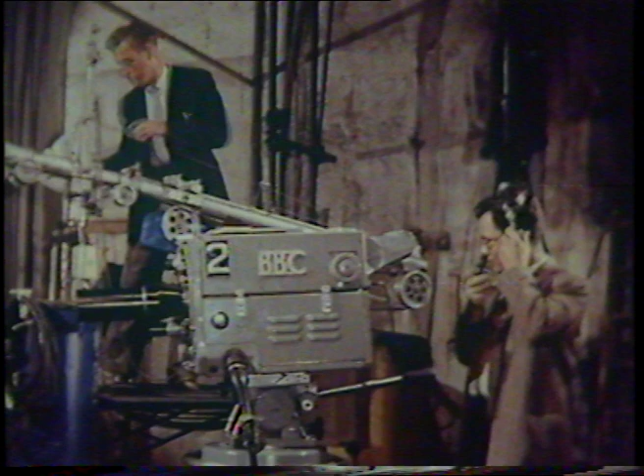Today, television is an integral part of the lives of most of us, bringing into our homes information and entertainment in endless variety. In the programs put out by the BBC television service, there's something for everybody: comedy, drama, music, sport, or the news. The news is one of the most widely viewed items in the day's program. Events of international importance, and some of rather less importance but no less interest, are collated, edited, and broadcast in sound and vision to keep you fully informed of up-to-the-minute happenings in the world around us.

Right. Cue caption scanner. Cue tape. Standby 1. Fade up 1. Fade down scanner.

Here is the news. There have been several political developments closely affecting Western Germany in London, Washington, and Bonn. Sometimes the seemingly less important news items are overshadowed by world events and lose some of their impact by their essential brevity. Take the next news item, for example. Television viewers in the south of England will have improved viewing, and the signal will have an extended range, for as from today there comes into operation the new television tower at Crystal Palace.

The Crystal Palace and the new television tower. This simple announcement begins the story of a tower that rose like the legendary phoenix from the ashes of its own past.

The Crystal Palace was a highlight in the history of the mid-Victorian period and had a very positive effect on art, commerce, and popular entertainment in its time. It all began with a scheme fostered by Albert, Prince Consort, to hold a great exhibition of all nations in London in the year 1851. At first, the idea was unpopular with many eminent politicians, but Albert and his supporters fought the opposition and won.

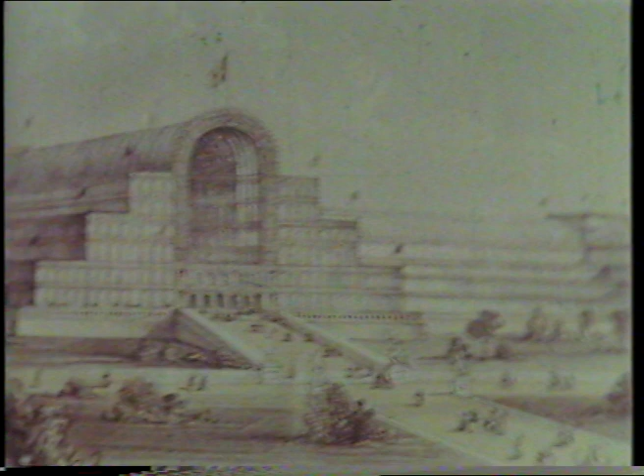Paxton had vision. Modern designers have referred to this building as one of the first successful examples of functionalism in architectural design. After the great exhibition was over, the structure was taken to pieces, considerably enlarged, and re-erected on the highest ridge of the Sydenham Hills. And so the Crystal Palace became nationally famous and one of London's most notable landmarks.

But times change, and popular taste in entertainment changes with the times. By the early 1930s, the palace had lost much of its popularity. New forms of entertainment had sprung up, and about this time, a new word was coined: television. A pair of water towers, 280 feet high, had been added soon after the palace was re-erected at Sydenham.

On one of these towers, experimental television aerials appeared. In this way, the Crystal Palace, center of popular entertainment and education for more than 80 years, became the center of early experiments with a brand new medium of expression. But not for long. One evening in November 1936, the building was totally destroyed by fire. The association of the Crystal Palace with television was over for many years to come.

18 years after the fire, the site was still derelict. The deserted gardens remained a clutter of broken stonework, dismantled railings, and weed-grown subways. And all that remained of the North Tower was the creeper-covered brickwork of its foundations.

Ironically, Alexandra Palace, built as a rival centre of entertainment to the Crystal Palace, became the headquarters of BBC Television in London, and until 1956, all transmissions broadcast over London and the South East went out from these aerials.

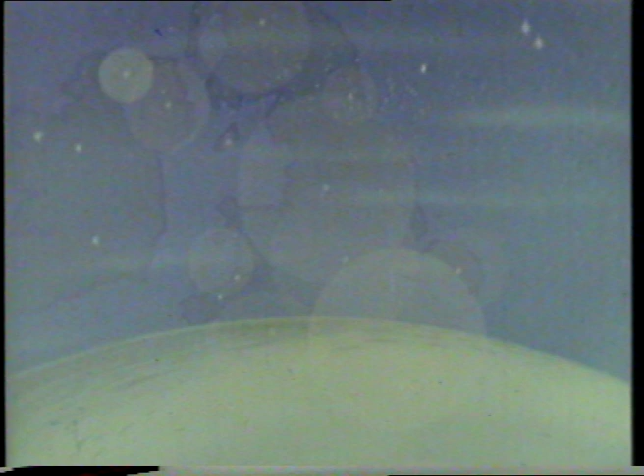This stylized drawing illustrates the principle. Very high-frequency radio waves are transmitted rather like beams of light. The range of reception is virtually the visual horizon as seen from the aerials. Therefore, the higher the aerials can be raised above ground level, the greater will be the transmission range.

Soon after the war, the masts began to go up. The 750-foot mast at Sutton Coldfield, serving the Midlands, was a stayed mast of triangular steel section. The next triangular section mast was built on high ground at Holme Moss to serve a wide area of the north of England. Other masts throughout the country were to be similar in construction.

But the aerials at Alexandra Palace were only 600 feet above sea level. To give increased range, a taller tower was needed, and a new site had to be found near London. Eventually, the engineers chose an ideal site, the very spot where the old Crystal Palace had stood for over 80 years. And so it was decided that the BBC's new London transmitter should be built on top of the long ridge of the Sydenham Hills. As soon as the site had been chosen, work began on the design of the new tower.

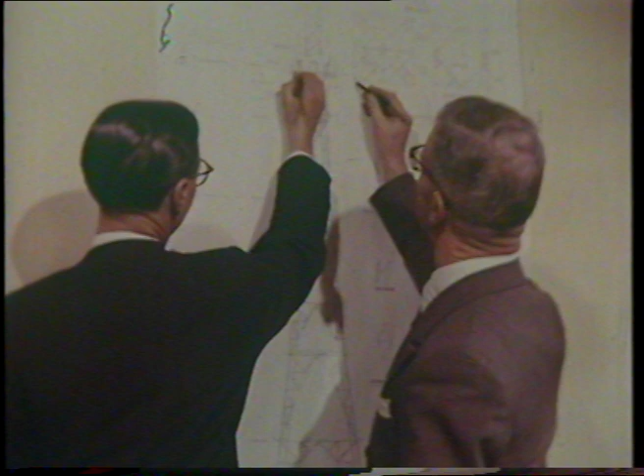At other BBC transmitters, stayed masts had been used. But site restrictions precluded the use of a mast at Crystal Palace, and it was therefore necessary to build a self-supporting tower. This form of construction is more aesthetically pleasing, an important consideration for such a landmark so near London, and the design received the approval of the Royal Fine Art Commission.

As the design calculation progressed, more and more work had to be done in the drawing office, preparing detailed drawings for the whole tower. At this stage, tests were carried out by the National Physical Laboratory and by the Imperial College to determine the aerodynamic stability of the tower.

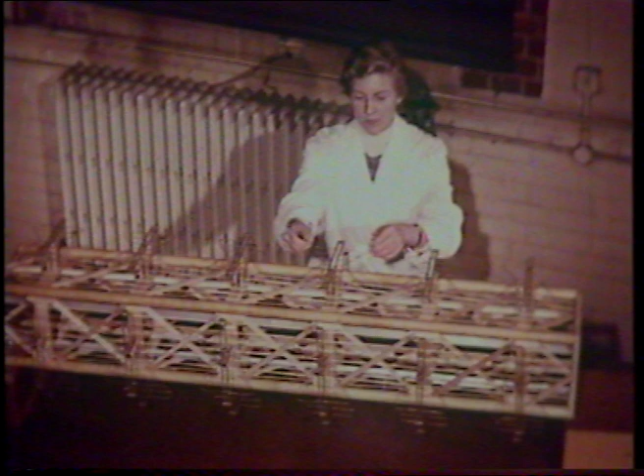For the purpose of tests, scaled sections of each of the aerial carrying parts of the tower were made. These sections were subjected to extensive tests in the wind tunnel. The airstream in the wind tunnel caused the models to vibrate, and in this way, knowledge of the behavior of the structure under various wind conditions was obtained.

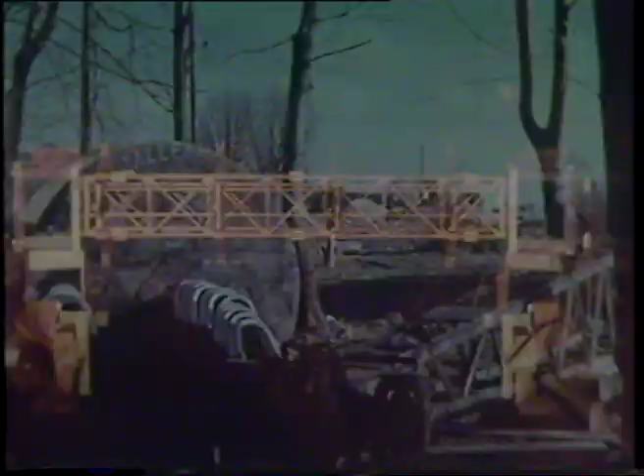Now, with the site cleared, the work of construction began. First, the area had to be accurately surveyed and marked out. Construction plant began to arrive on site.

Work had already started on the lower terrace, where the new underground transmitter building to house the electronic equipment was going up.

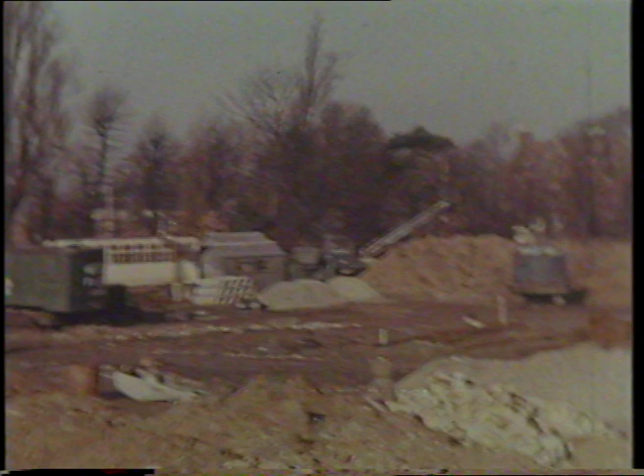Piles had to be driven to support each of the 4 legs of the tower, but because the transmitter building was being constructed close to and below the site, vibration had to be minimized. This factor was taken into account in deciding the method of piling to be used. The 4 concrete foundation blocks were to be set 120 feet apart.

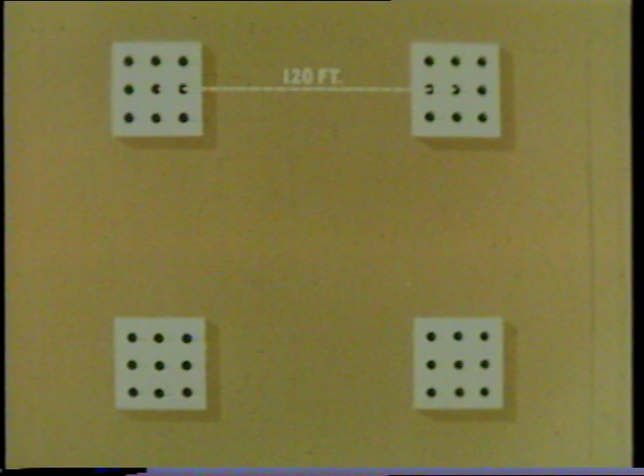Each leg was to be supported by 6 vertical and 3 raking piles capped by reinforced concrete. These concrete pads were to be 14 feet square and 4 feet thick. The piles would have to be driven to an adequate depth to support solidly the 4 splayed legs carrying the immense weight of the completed tower.

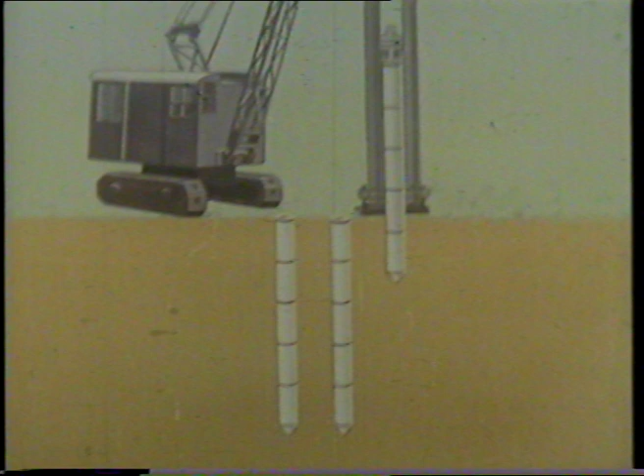Below ground, the piles would look like this. In driving each pile, the concrete shoe attached to the mandrel forces its way into the ground, and shells are fitted one above the other as driving progresses. Each blow of the hammer sinks the assembly deeper into the ground.

The ground below this site is formed of London clay. The construction engineers decided that the pile should be driven to a predetermined depth where the clay becomes stiffer and more resistant. When each pile reaches the required depth, a steel reinforcement cage is dropped in, and the shells are filled with concrete, forming an unstressed solid core.

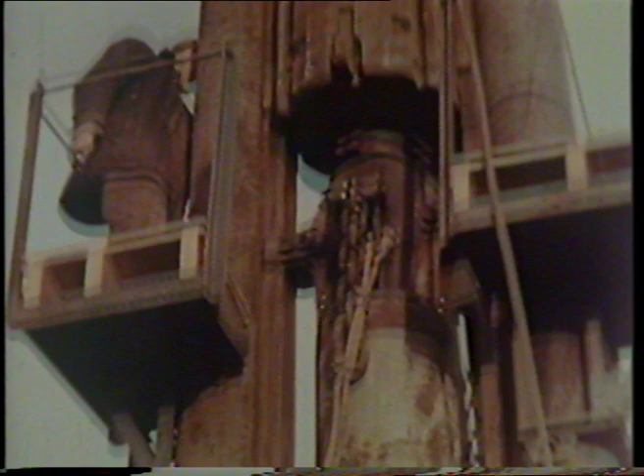While the work of piling was being done on the site, a great deal of important work for the tower was going on more than 100 miles from London at the works of another member of the BICC group. The whole of the steelwork for the Crystal Palace Tower was fabricated at this extensive factory in the city of Hereford, where they specialize in the production of lattice towers and masts and of unusual structures such as the new tower.

This factory isn't at all the dirty place you'd expect a steelworks to be. 35 years' experience has proved that only under such ideal conditions is it possible to attain the high standard of workmanship necessary for erection on site to proceed smoothly.

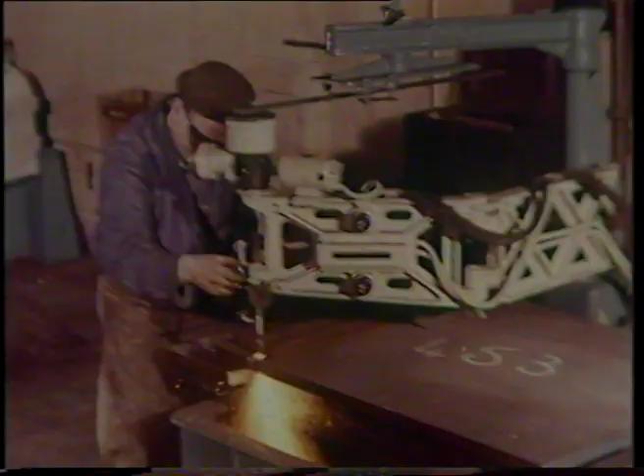The work done in the factory is checked in the black, that is, before the metal is galvanized. Here, one complete leg section has been assembled on the ground so that inspectors can check it from end to end before it goes along to be galvanized. Every section of the tower was put together for checking in the same way.

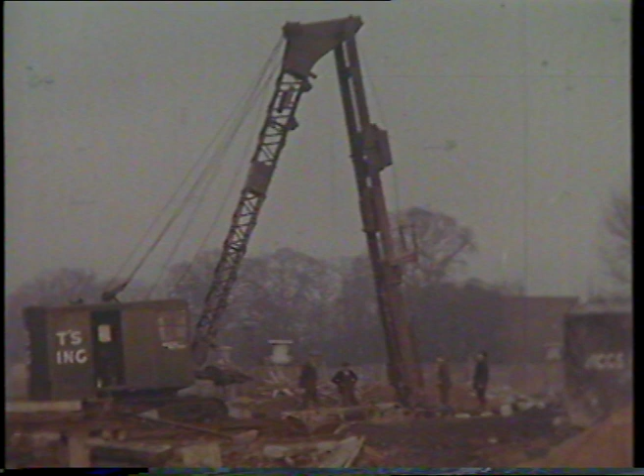Back on site, the work of piling was being finished off. Some of the century-old foundation work of the Crystal Palace was discovered when the site was being prepared. Piles were to be driven here, so this area would have to be filled in and made good. Steel grillages fitted with heavy-gauge bolts to hold the base plates in position had to be emplaced and concreted within the 14-foot pile caps.

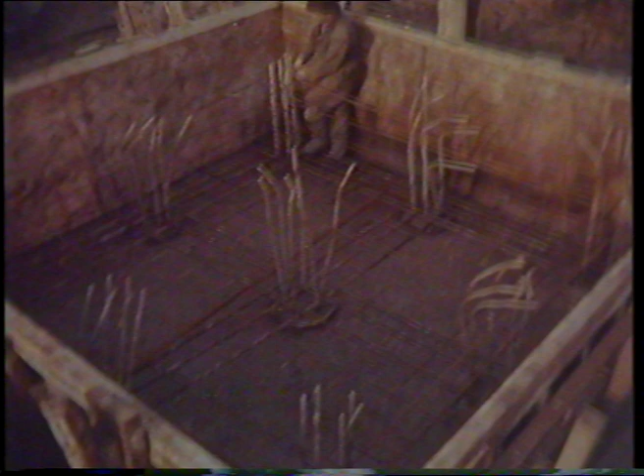With its grillage emplaced, each pile cap was to be built up with reinforced concrete. Great care had to be taken to avoid throwing the base plate bolts out of position.

Foundation work continued during the winter months. The work went on in some of the worst weather of the year. Only the most extreme conditions of frost and snow slowed down progress on the site during that first winter.

By the end of the winter, the site had been prepared for construction above ground level. A number of temporary concrete blocks had been emplaced, ready for guy ropes to be attached.

In the center of the site, a derrick 230 feet high was erected. This derrick was built up of 20-foot welded sections, and 2 derrick poles were temporarily attached to the top. Each section was winched up to be manhandled into position and bolted on.

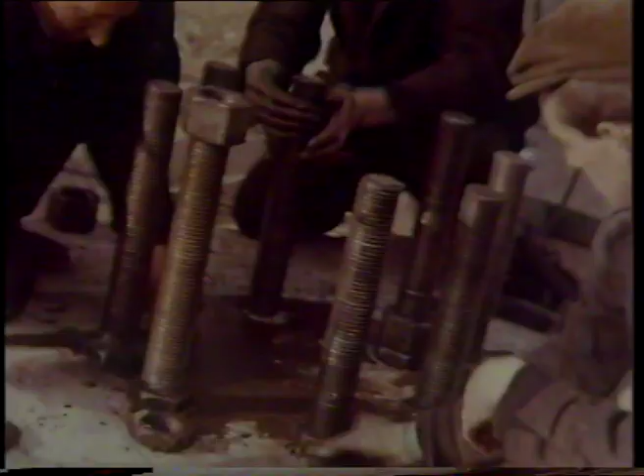By now, the construction team were ready for the base plates. Each leg of the tower was to depend upon one of these thick steel base plates for its strength, and their production involved a good deal of specialized study at Hereford.

When the component parts had been cut to shape and holed, they were rigidly mounted in a jig for welding. The jig can be revolved in order that the operator can deal with every joint in turn and work at any angle that is most convenient and efficient.

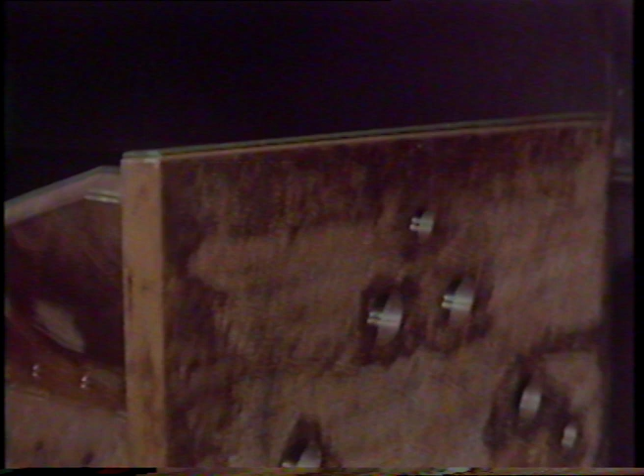As soon as it has cooled off, the base plate is shot blasted to remove weld slag and taken straight into the galvanizing shop, where it has to be properly cleaned in acid, or pickled as they call it, before galvanizing. Galvanizing is simply coating steel with pure zinc, and to do this, the work is immersed in a bath of molten metal. But the protective coat you get by doing this is different from a coat of paint. Broadly speaking, molten zinc and steel act together, and the final covering is a layer of zinc firmly bonded to the steel base by an amalgamation of the two metals.

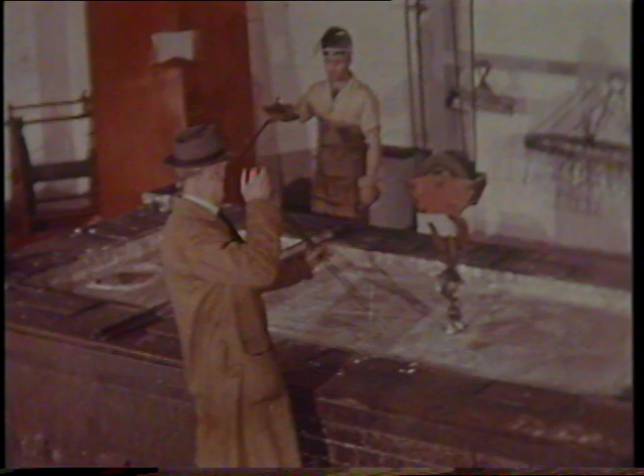The base plate is left in the bath for some minutes, and the surface is cleared of oxides to avoid contamination of the work. When the expert who controls the operation decides it's ready, the base plate comes right out and is drained.

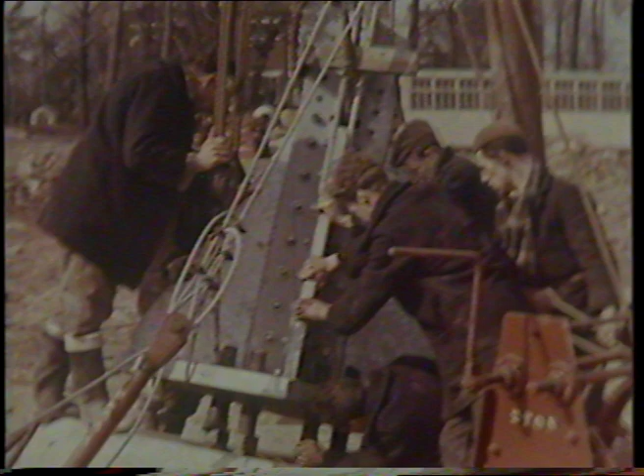The high standard of accuracy insisted on at the factory ensured that the base plates fitted perfectly on their bolts at site. When the four base plates were in position, an important phase in the work of construction had been completed, and everything was now ready for the erection of the lower panel to a height of just over 80 feet.

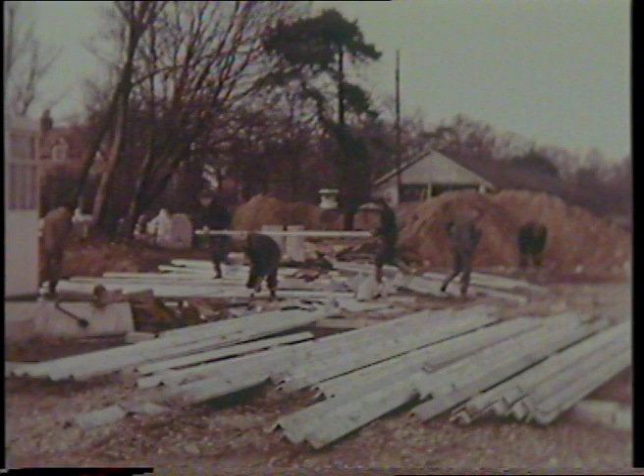Already, the angle steel for the main leg sections had begun to arrive at the local rail depot. On site, the metal was being sorted and stacked. Many hundreds of small plates and shaped sections were needed for the job, and thousands of nuts and bolts and washers.

The fabrication of steelwork for the body of the tower had been going on for several months. At Hereford, the special high tensile steel came into the stockyards from the rolling mills in increasing quantities. After it had been checked and inspected, it was fed into the production shops where the cranes, driven by girl operators, were ready to take over.

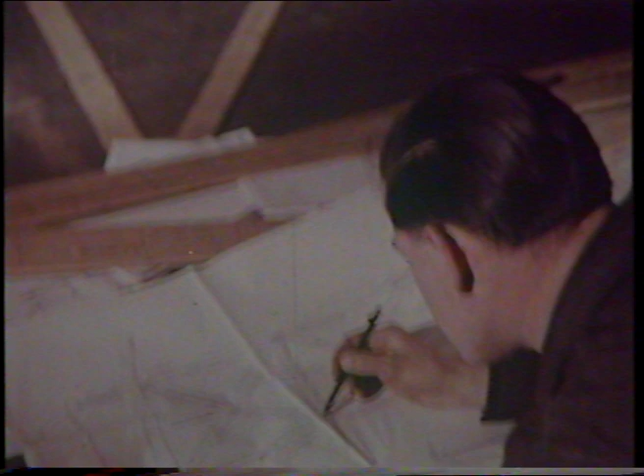But long before the steel left the rolling mills, the template makers set to work drawing down the tower full size from the designer's details. Wooden templates were made for every piece. These templates are a special type of pattern carrying full instructions for marking off and used by men in the fabricating shop.

One of the markers off checks the details. He then scribes the bar for length and after writing up the instructions in chalk, sends it across to the saw. Slowly but surely, this powerful machine cuts its way through the metal.

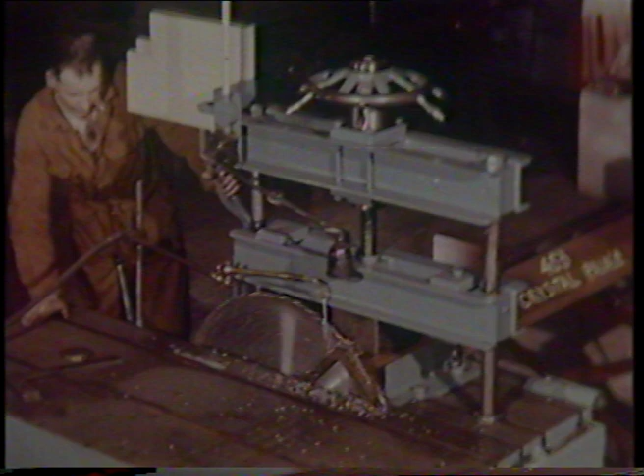After the members have been cut to length, the bolt holes have to be put in them. With the lighter bars, the operator presses the treadle with his foot and the holes are punched out cleanly in one stroke. Because they are much thicker, the heavier bars have to be drilled.

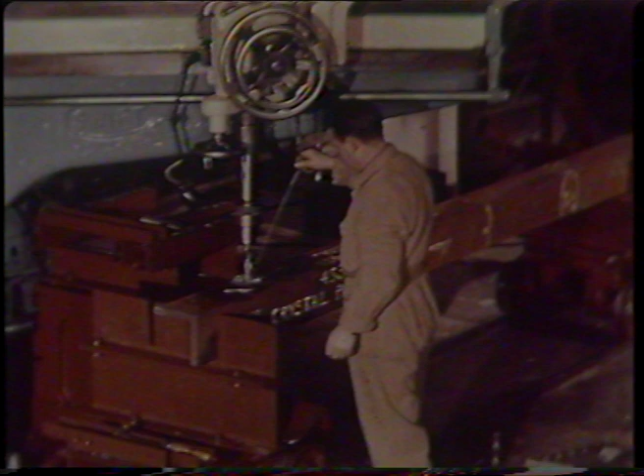This leg section member is nearly an inch thick and weighs over half a ton. The operator is drilling a pilot hole to fit a jig set on the bar. All the important drilling is done through steel jigs, which are made in the tool room by skilled craftsmen. These jigs take the place of the wooden templates and have holes of the right size at exactly the right spacing through which the drill actually passes.

Each jig is inspected and tested before being passed for service. To use a jig set, the operator pegs it into the pilot hole already made and runs the bolt holes in exactly where they are required.

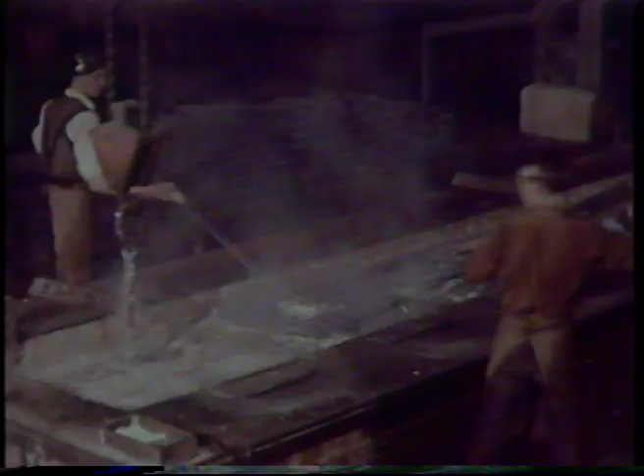Cut, holed and stamped with their identification numbers, the bars go into the galvanizing shop for pickling and dipping. The longest bars of all were used for these main members, but some of them were too long to go in all at once and had to be dipped in two operations, first one end and then the other. Covering up the join needs experience and skill, for there must be no unevenness in the final coating.

The skimming hands repeatedly boil up the molten metal with their paddles to give a washing effect on the bar. Also, they clear away the zinc ash, which continually forms on the surface of the bath. As with the base plates, the lifting operation is carefully controlled when the time comes to take the bar out of the pot.

When each bar is laid out on the trestles alongside to cool, it's carefully inspected for blemishes or faults.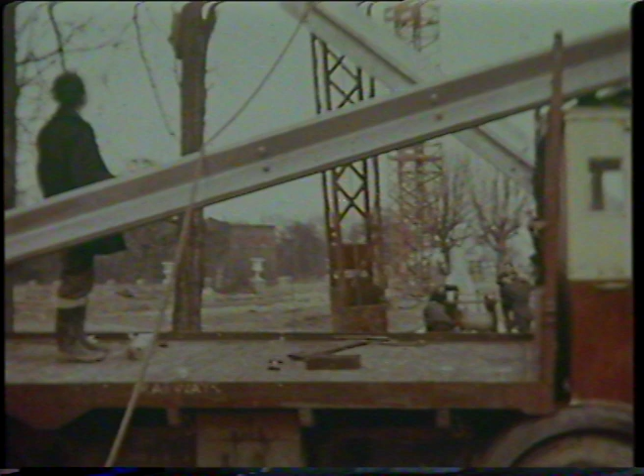The heaviest sections to be handled on site were the leg members. These consisted of 4 angles bolted together, making a cruciform shape. This shape added strength to the structure and made the best possible use of the standard heavy angle steel sections.

The beginning of steelwork erection is always a critical period for the construction engineers. Close liaison between the designer and site staff is of the utmost importance. The method of erection of the bottom panel was now fully discussed. In the first few weeks, all the detailed planning and the accuracy of the steel fabrication will be put to the test.

On site, the first main member of leg number 1 was lowered onto the base plate. Some of the bracing members were partially assembled on the ground before being hoisted into position. Progress was constantly watched by the design and construction experts. Many months of planning and paperwork now began to take tangible form.

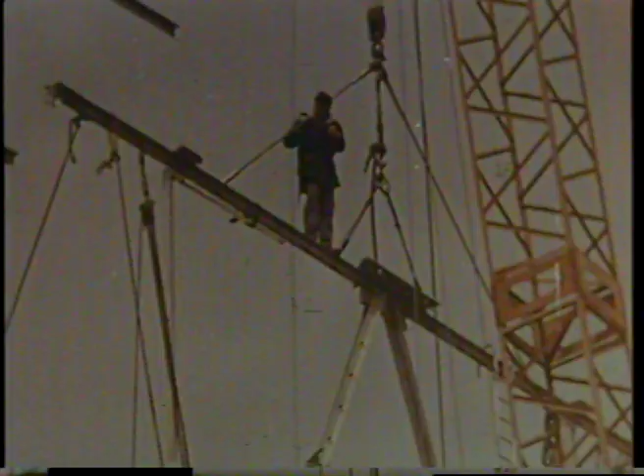A complete span section was assembled on the ground and taken up to bridge the gap between the first 2 80-foot leg members. A 125-foot derrick was used to hoist this large assembly into position. This derrick was afterwards to be used as a floating derrick.

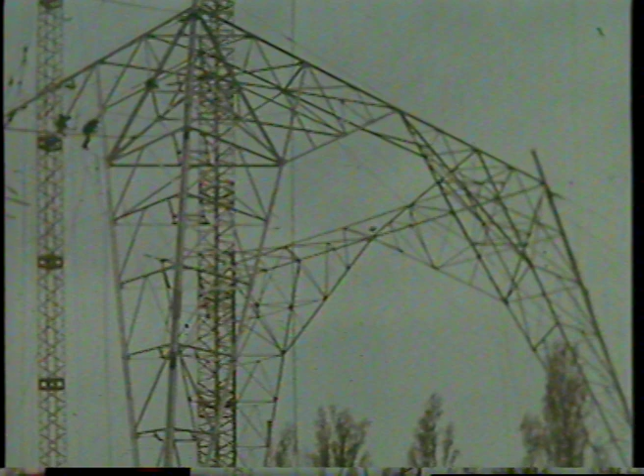From now on, the men of the construction team spent most of their working days aloft and getting higher as the days went by. When all 4 legs were standing up, the most difficult job on the lower panel had to be tackled, the bridging of the last gap between the leg sections.

The span was already assembled, ready for hoisting. The designer and the site engineer had to go through the detailed drawings and discuss the closing of the gap. Up went the assembled span, carefully steadied and guided by the men on the ground. Bridging the last gap of the first panel was a critical operation, and its final success proved that the foundations had been set out with the utmost precision.

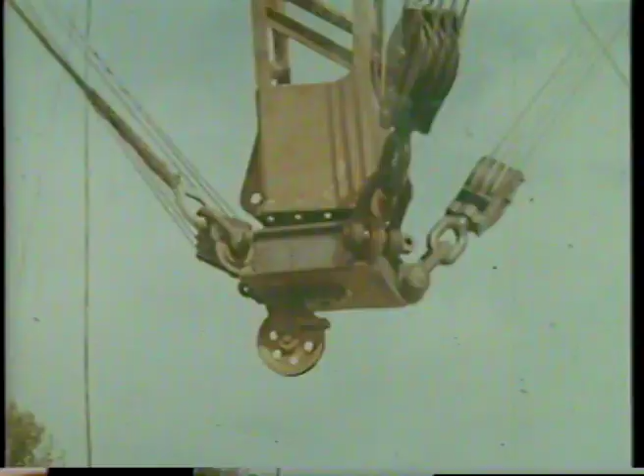Again, the detailed drawings had to be checked in preparation for the next stage of construction. The first panel of the tower was complete to a height of 80 feet. Now, to enable the second panel to be erected, the 125-foot derrick was floated on steel ropes high enough to enable it to be used for hoisting the steelwork above the lower panel.

From this stage, the 125-foot floating derrick was used for all construction work until the 440-foot level was reached, when a 45-foot floating derrick was to take over.

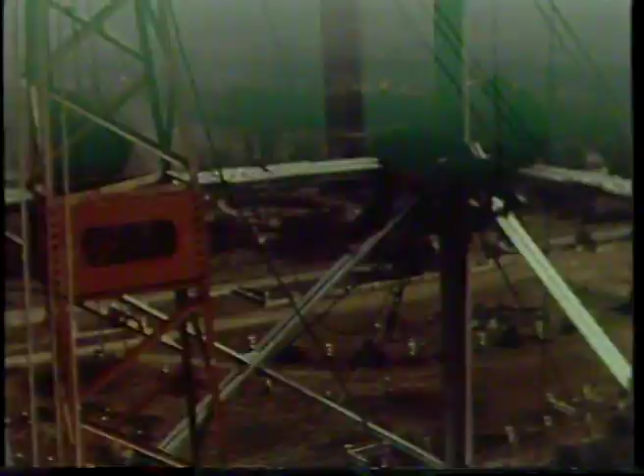The second and third panels were to be erected on similar lines to the first panel. In each case, the main leg was fixed into position, followed by the bracings, until a whole corner of the tower was complete. Temporary steel wire ropes held each corner until all four were connected together. Every section fitted perfectly within the framework of the structure. This was due to the extreme care taken by the steel fabricators during manufacture.

In effect, the work on site became a daily routine job: assembling various sections on the ground, preparing them for lifting, hoisting them to the required height, and bolting them into position.

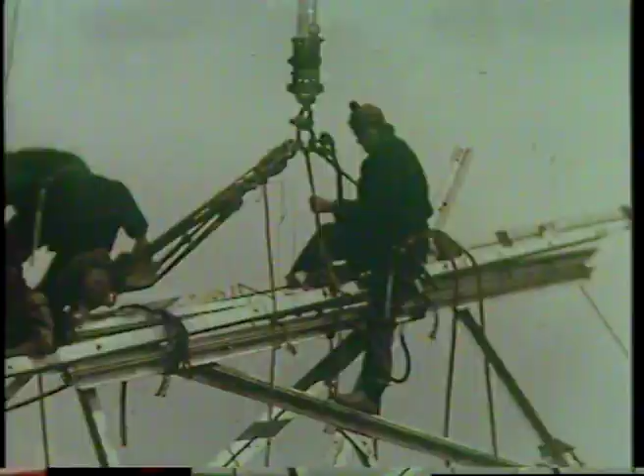By now, the periphery platform at the 150-foot level had been completed. The tower had reached a height at which the 230-foot derrick could no longer be used, and so it was dismantled and taken away from the site.

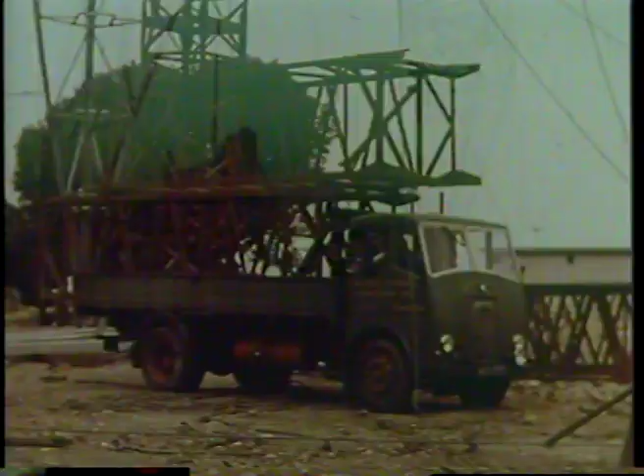Even at heights like these, the construction team worked as unconcernedly as they did when the first leg member went up.

The tower is similar in shape to the Eiffel Tower, up to 440 feet. All the way up to that level, cruciform angle steel was used for the main leg members.

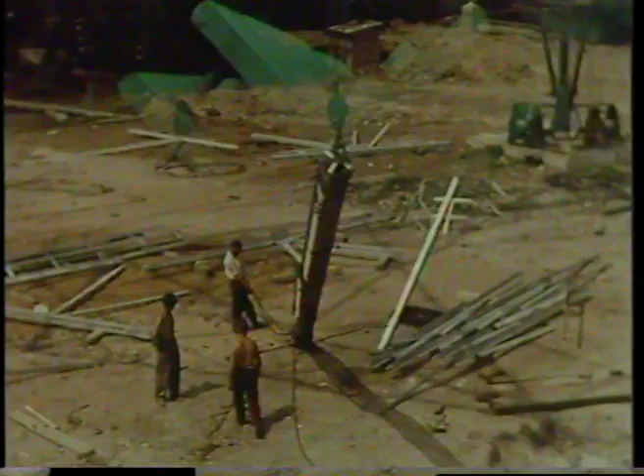This was one of the last straight cruciform sections to leave the ground. Normally, the higher the lift, the smaller are the loads handled. However, such was not the case during the erection of this tower. Loads of 3 tons were handled up to a level of 500 feet, and later, a load of 2 tons was carried right to the top of the tower.

To control the dropping into position of each main leg member, whistle signals were given to the winchman on the ground.

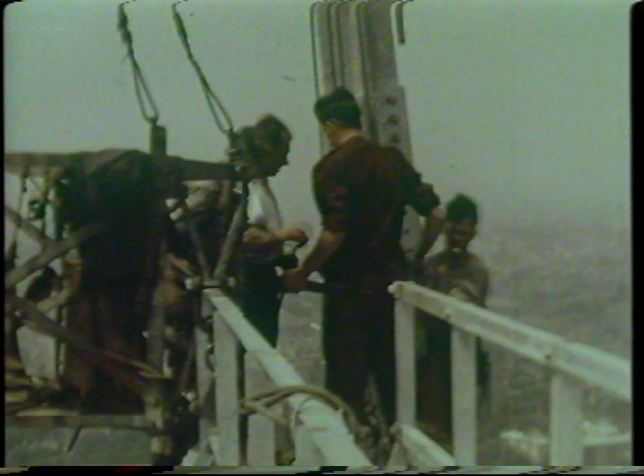Moving the floating derrick into position for use at these high levels was a job which had to be delicately handled. The head and base of the derrick had to be pulled over and raised by ropes attached to 8 hand winches operated from the ground.

As the derrick was raised, so the tower grew. The construction team had to take advantage of every minute of good weather to tighten up the nuts and bolts in the splices of the bracing members and generally to consolidate the work already done.

When the tower had grown to 400 feet, the surveyor set up his instruments on an improvised platform at the top to check the accuracy of the construction work so far completed.

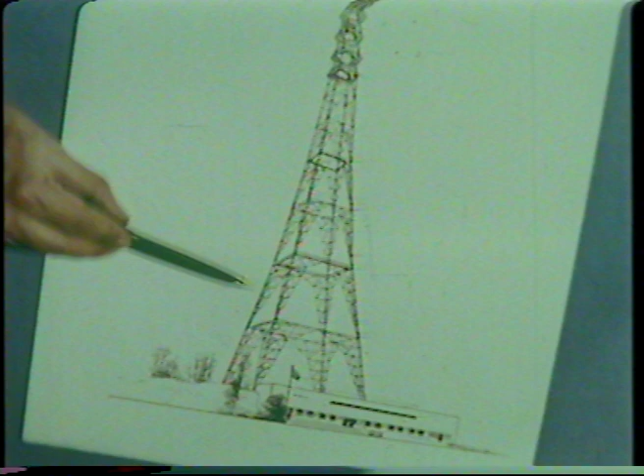Construction up to the 440-foot level was now nearing completion. From this level to the top, the tower was to be built up of parallel sections designed to carry the greater part of the aerial array.

At 429 feet, the design provided the first of 2 bends in the angle steel leg members. A second bend in each section at 440 feet would narrow the tower to 9 feet 6 inches square.

At the first of the double bends, a platform was to be built. The main aerial-carrying part of the tower is above the platform, and from this point, aerial design requirements were a main consideration in determining height and width.

This level also marked the transition to rod section from angle steel. These 4 bent leg members were the last angle steel sections to arrive on site. With these sections in position, the structure would have reached 440 feet.

The bent angle sections went up. But at this stage, the construction company were asked by the BBC to stop all work above the 440-foot level, pending modification in the design to make provision on the tower for additional aerials required by other services, which the BBC had undertaken to accommodate.

The top part of the tower had to be redesigned completely, for roughly twice the number of aerials were now required. The designer was faced with the problem of an increase in height, without any drastic alterations to the supporting structure. Loading now became the governing factor instead of the deflection of the tower.

The principal changes in design were to increase the height of the structure from 640 feet up to 708 feet.

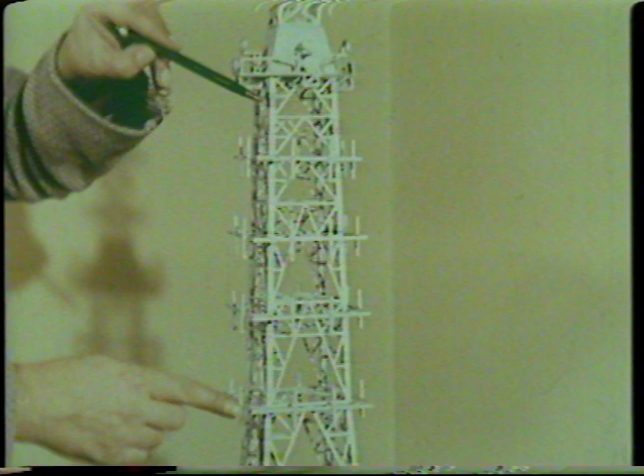Detailed alterations to accommodate changes in the aerial array were as follows: to fix additional Band 1 aerials on the supporting structure between the 350 and 400-foot levels, to make the upper Band 1 section 72 feet in height.

Above this, to allow for 2 sets of Band 3 aerials instead of 1 Band 1 aerial, and to fix an aerial required for the BBC's experimental transmissions in the ultra-high frequency Band 5, right at the top of the tower, bringing the overall height of the structure to 708 feet.

While the top section was being redesigned, construction work on the tower continued. Above the 350-foot level, bracing members were strengthened and new platforms built.

Cable trays, to support about 40 different cables, ran up on one of the legs, and the next step was to fix the additional Band 1 aerials on the supporting structure below the 400-foot level.

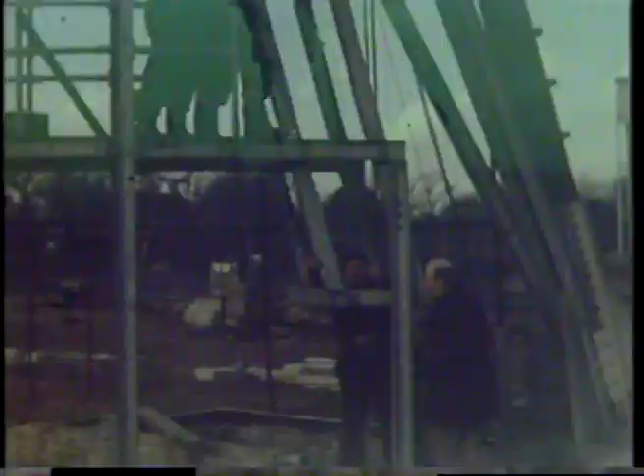These aerials were to be used for transmitting the BBC's programs until the Crystal Palace Tower was working at its full power. A permanent hoist was needed to convey the BBC engineers to a point from which the aerials could be serviced and maintained. This hoist was designed in such a way as to fit into the framework of the tower without spoiling its appearance.

The hoist was constructed to run up to a platform just below the 400-foot level. Guide rails were fitted inside one of the legs of the tower to carry the passenger cage. An unusual feature in the design of the hoist is the way in which the cage changes direction slightly at the bend points, but still remains vertical right up to the top of its travel.

In due course, the testing of the hoist was successfully completed. From the construction engineer's cradle, the tower now looked like an enormous spider's web.

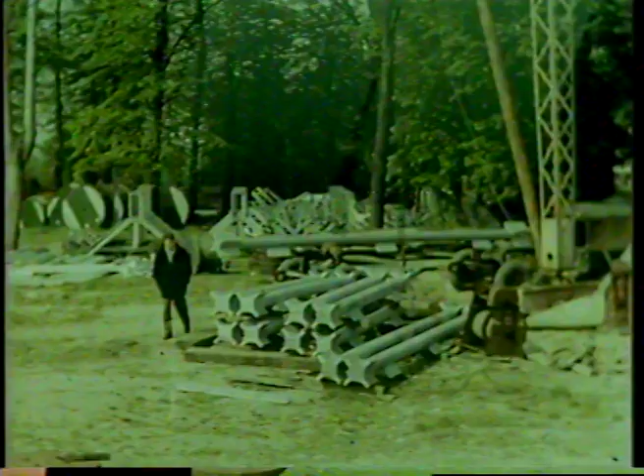And now only the redesigned top section remained to be built. From the 440-foot level upwards, solid round section steel was to be used for the main legs. Lengths of 8-inch diameter, solid round, began to arrive on site, complete with gusset plates ready for erection.

When these round sections were made, gusset plates with the bolt holes already in them were welded to all the leg members, not only to take the side bracings, but also to enable each length to be connected to the next one.

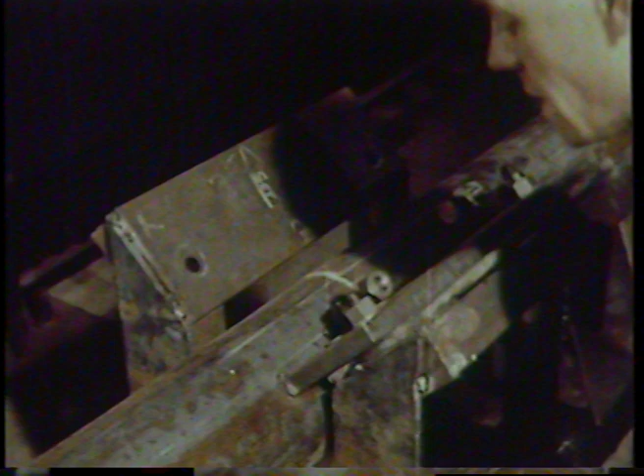These connecting plates were assembled in a specially designed welding jig to ensure that they were all in the right place and lying at the correct angle when finished, and also to enable the welder to operate down the length of the bar with the work always at the most suitable angle for him to produce a perfect job.

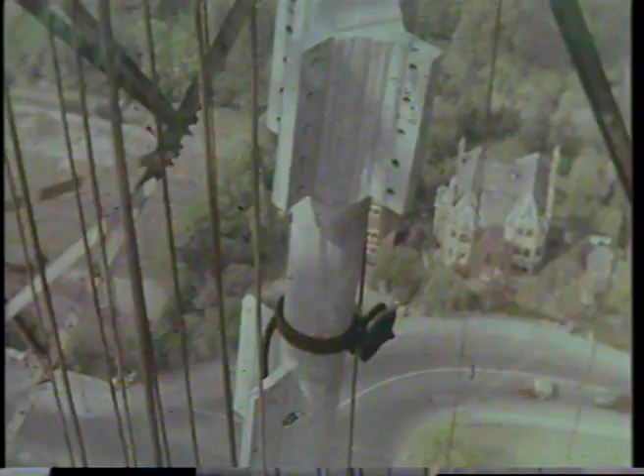On site, the final stage in the erection of the tower had begun. The first bar of the top section to be taken up was of 8-inch solid rod weighing, with its lifting tackle, over 3 tons.

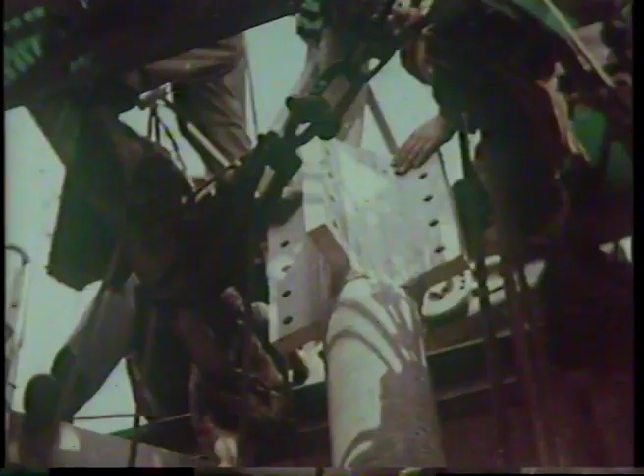This first main leg was lifted within the periphery of the tower and threaded through several platform positions. Great care had to be taken throughout this operation, especially when the leg section was manhandled through the narrow aperture in the middle of the top platform.

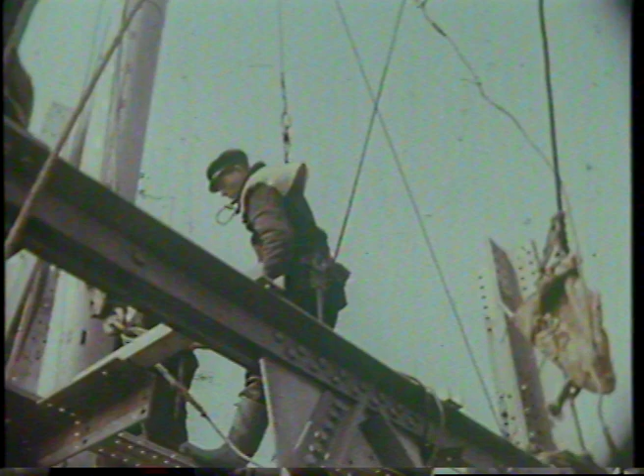Close supervision was necessary. The site engineer and the foreman left nothing to chance. Then the erection team took up their positions at the top of the tower to receive the new steelwork. A final check was made by the foreman, and when the leg was clear of the existing steelwork, the first round section was lowered into position, ready to be bolted on.

Now the tower started to grow again. The problem of continuing to build with the lower Band 1 aerials already in commission then had to be faced. All the steelwork above the 470-foot level had to be lifted outside the periphery of the tower to speed up construction. And so an unorthodox method of erection had to be evolved.

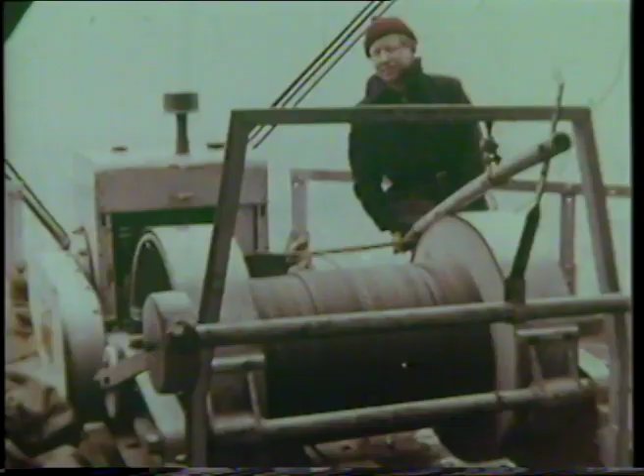At 429 feet, a special platform was constructed on which two 45-foot tubular derricks were mounted. The booms from these two derricks were operated from two winches working at ground level. The steel was lifted up to the erection platform and then transferred to the floating derrick boom. From this level, the steel was lifted by the floating derrick, operated from a winch working on the erection platform.

By now, a helicopter was needed to enable the film record of the work to be completed.

At two points in the upper part of the tower, double bends had to be introduced into the 7-inch diameter solid round sections. Bending a steel rod of such a diameter is not easy.

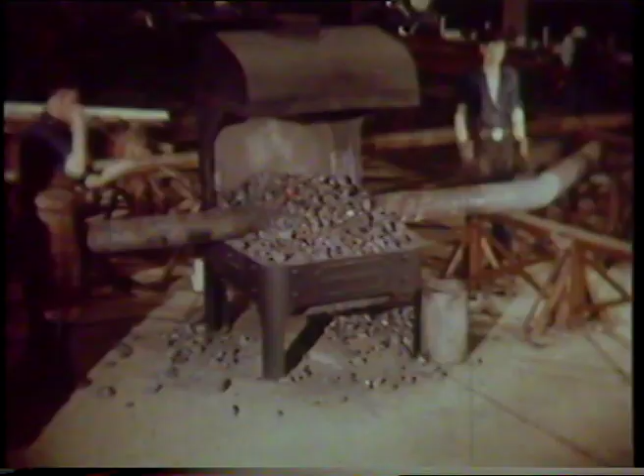First, the position of the bends is marked on a bar from a wooden template before the bar is sent across to the smith's hearth to be heated. The bar is carefully tended by the blacksmith, who lets it soak in the fire until it is red hot right through. When it is ready, the bar will be swung across to the bending machine.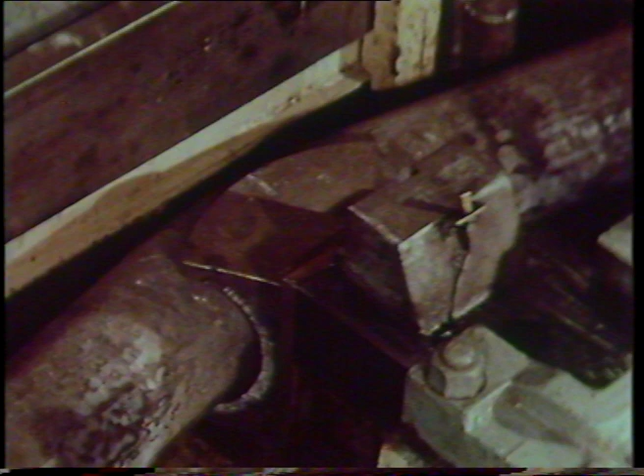Slowly, each bend begins to take shape as the operator brings the jaws of the press closer to the ram. These men become so experienced in this class of work that they can tell by eye when the right amount of bend has been put in. The steel template is needed only as a final check before the bar is taken away from the machine to cool off.

On site once again, the work followed a normal routine. The sections were lifted off the ground and hoisted up to the erection platform. There, the steel was transferred to the floating derrick and taken right to the top of the tower to be dealt with by the erection team.

The construction of the upper part of the tower was unusually difficult because of the necessity of using a heavy derrick in a very confined space. Weights of the main leg sections were of the order of 2 tons each, and for this work, the specially designed outriggers were extremely useful.

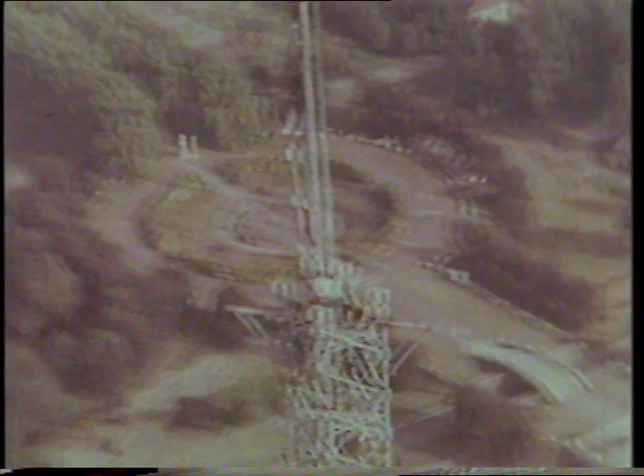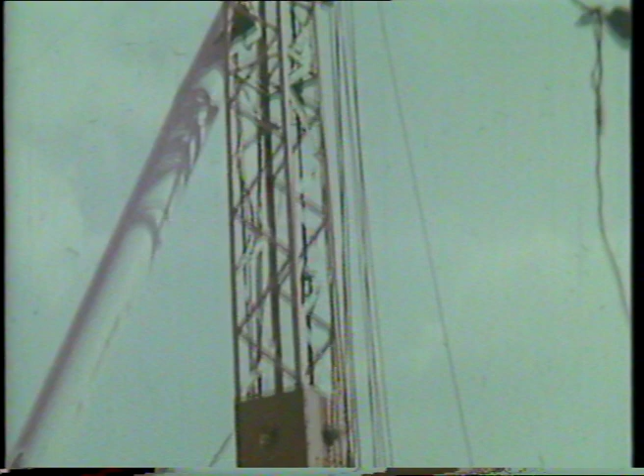Two 60-foot lattice derricks were assembled on the ground and taken up to deal with the topmost unit of the tower, the aerial required for the BBC's experimental transmissions in the ultra-high frequency Band 5. The two derricks were to be fixed on either side of the top of the tower to support between them the Band 5 aerial while it was being lowered into its stepping on the top platform.

The Band 5 aerial is mounted on tubular steel sections, making up a total length of 40 feet. Soft copper rod is coiled about the unit for the greater part of its length. When this aerial came to be hoisted, very special care had to be taken to avoid damage to the copper coil. By now, the top of the actual structure had been reached.

The addition of the Band 5 aerial would bring the tower up to its final overall height of 708 feet. When all the constructional work had been completed, the helicopter took off to fly around the tower and bring back some unusual angles of this unique structure, the highest self-supporting tower in the British Isles.

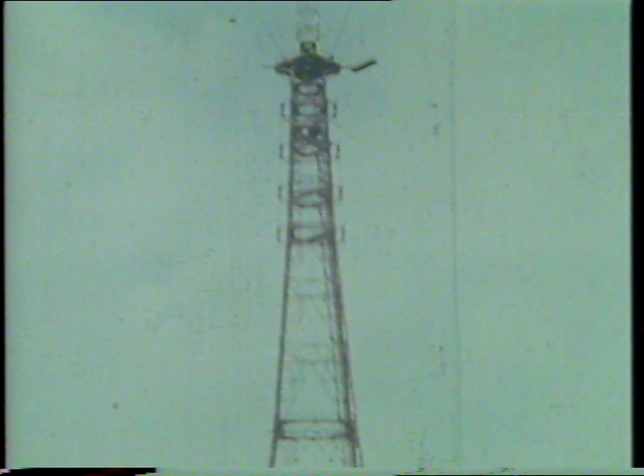According to the usual custom among constructional engineers on such occasions, a Union Jack appeared, fluttering in the breeze from the topmost point.

All that remained to be done was the installation of the aerials on the various sections of the tower. The two sections immediately below the top platform were reserved for the two sets of Band 3 aerials.

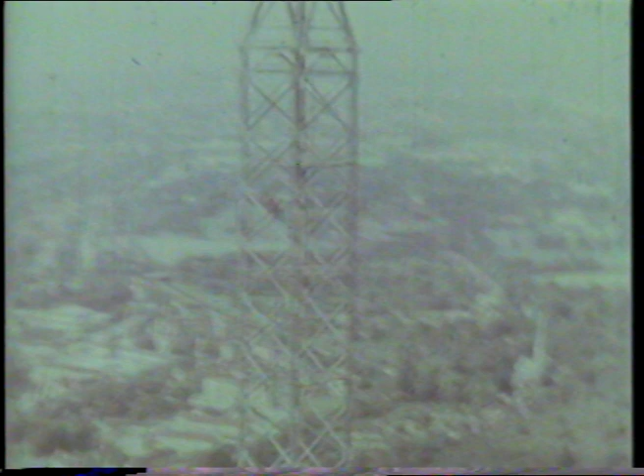Upper Band 1 aerials were to be installed on this section of the tower above the main platform. And just below the main platform, the lower Band 1 aerials had been fixed and were already in use, transmitting the regular daily television programs.

The work of construction had been greatly simplified by the use of a winch and derricks high up on the tower, and this lifting arrangement was also used to install the aerial arrays. Within a short time of the completion of the tower itself, some of these aerials were already installed on all 4 faces of the structure.

After many years, the Crystal Palace is once more an important spot on the map. On the actual site of the old palace, the new Crystal Palace television tower has risen to broadcast entertainment and education in the modern manner.

At this point, I decided to take another look at the finished job before the construction engineers left the site.

Ah, Mr. Ward. Meet Bob Danvers-Walker. How do you do, Mr. Ward? Glad to meet you. Mr. Ward is in charge of our special projects department. I would say that this certainly comes under the heading of special project. Yes, we had a number of problems to tackle. Oh, is that so? It's very interesting. Would you mind if I go up and record a few impressions? Go ahead and take the hoist. Thank you very much indeed.

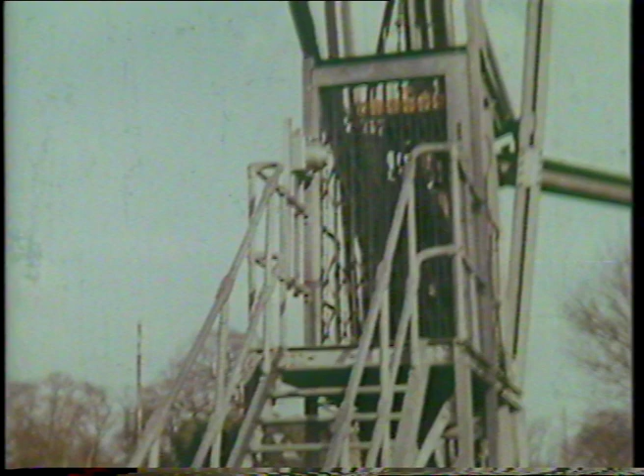And so I went up with Mr. Stewart, the chief overhead construction engineer, to the terminal point of the hoist, 400 feet up. Then we climbed up to the main platform at the 440-foot level. It was well worth the effort. Even on this rather gusty day, the view from this height was remarkable.

You know, to me, it feels as solid as the Rock of Gibraltar up here, but I suppose that's hardly surprising, since I'm standing on 450 tons of steel. What is surprising is that there is such a great weight of steel at the top of this slender tower.

Theoretically, I'm told that if it were possible for me to sit on top of the Band 5 aerial at over 1,000 feet above sea level, I'd be able to see the coastline of Kent and Sussex. That is perfectly true.

Down below, I can just make out the blue flag of the BBC flying over the London television station building. It's strange to think that the old Crystal Palace stood here over 100 years ago, and that experimental television broadcasts went out from this spot until the fire in 1936.

No wonder that the construction of this great tower has reminded some people of the legend of the Phoenix. And the Phoenix Tower is not only an achievement in steel construction, it is also a symbol of future development.